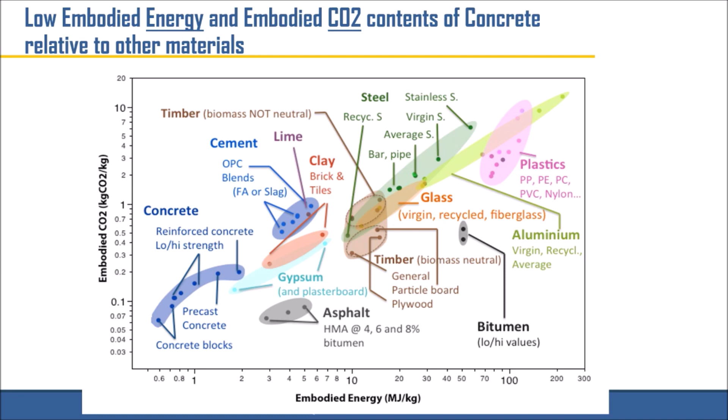But to start with, when we talk about concrete and we look at all of the CO2 and energy that's tied up with products in our industry - concrete, lime, clay, steel, glass, timber, asphalt - concrete really is the low end of the spectrum as far as CO2 output and energy input. We have a position where if we can reduce the carbon output from our concrete, we can make a significant savings. If we use other building materials, we start at a much higher baseline, a much higher global warming potential. So we are working hard to improve our position as it is right now.

EPDs, environmental product declarations, are sold like you buy food at the grocery store with a label that tells you of all the ingredients. That's partially true. The basic unit of an EPD is a global warming potential, which is in kilograms of CO2 per cubic meter of concrete. It's an international number, so most of us like to convert to cubic yards. But it's based on carbon inputs from the source raw material and transportation of that material to a batch plant or a concrete plant site, and then also the energy used to produce the concrete at the plant.

But it stops calculating the global warming potential or the CO2 potential at that point.

The initial EPD for a plant is pretty expensive - it ranges from $5,000 to $7,000 to get a plant set up. They have to go through the process of calculating all of the cost, the fuel cost, the generator or power grid that's used to make the plant. But once your plant is set up, you can generate multiple EPDs after that. Every mix design will have a different EPD if you really get down to it, and they can do that for a very minor cost. It's the initial setup where the expense is.

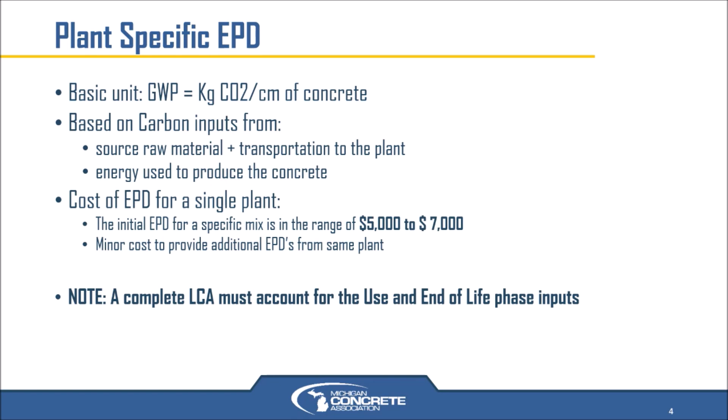But the other important thing to think about here is as we move forward, we need to see what happens during the life of that structure or pavement.

EPDs are based on what's known as a product category rule. Each industry—glass, wood, timber, asphalt, concrete—got together amongst themselves individually and developed product category rules. Everybody wanted to be measured the way they wanted to be measured. So as a DOT, you're going to see EPDs from different materials. They are not all apples—they're apples, oranges, grapes, tangerines. You can't compare one EPD to another and say this product is better or worse based on an EPD.

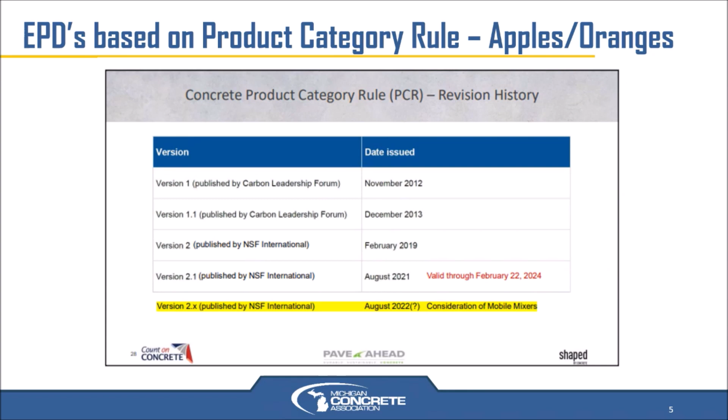And EPDs are in transition. They're updated—how they measure things. There's some changes that are happening as we speak.

But we also know that the life that structure is put in over the next 30, 40, 50, 60, 70, 80 years, depending if it's a building or a road structure, is where most of the carbon impact is going to happen. If you have a building that you have to heat and air condition, the heating bills and air conditioning amount to probably more like 90% of the carbon input, rather than the small portion that goes into construction.

And in addition, during its life, concrete reabsorbs carbon dioxide—CO2 is reabsorbed into concrete. So any surface concrete that's exposed, like a road or a column in a building or a wall, will soak up carbon during its life. Maybe 15, 20% of the carbon that was released when it was constructed comes back into that product during its life.

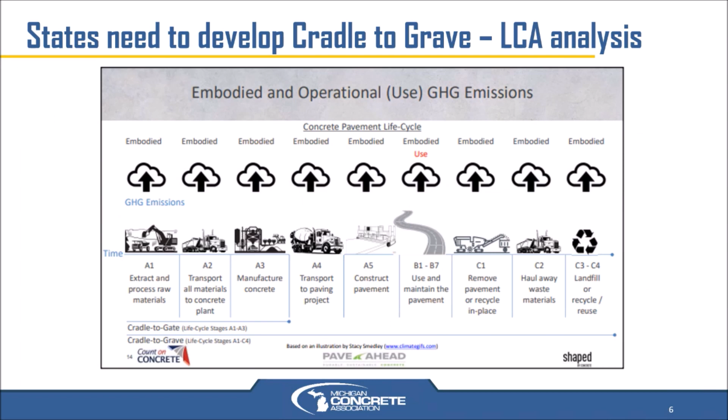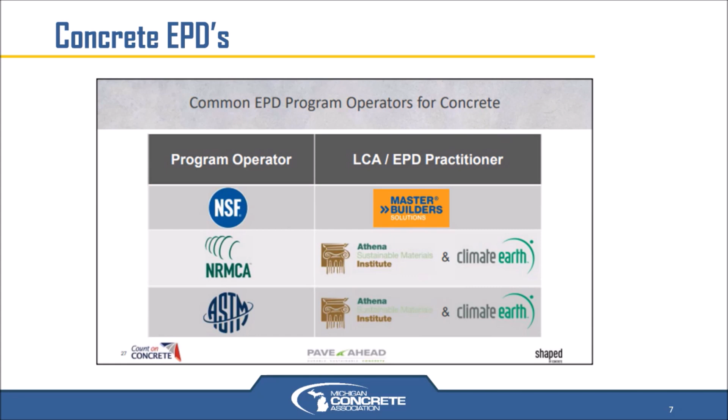Concrete EPDs, and on all EPDs, you need to have a program operator and a practitioner, but also a third party. So with our EPDs in concrete, NSF—now that's not the National Science Foundation that TRB is part of, or what you saw Dr. Fauci work for with COVID, but that is NSF—it is an independent third-party body that was formed in 1944 out of the University of Michigan, and it dealt with food safety and setting up safety standards for small restaurants.

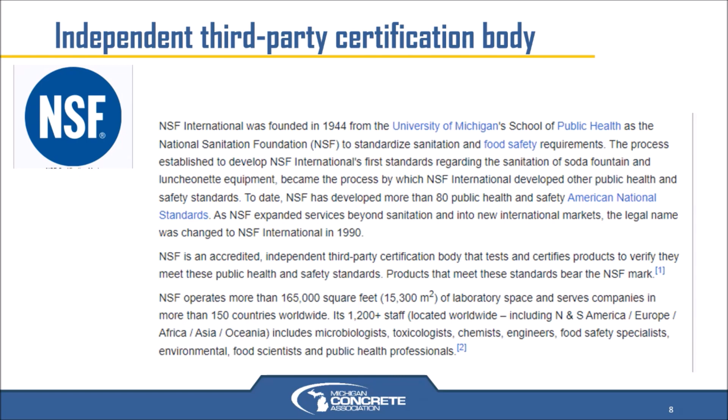And they are one of the leaders still today in testing and keeping people safe in the food sciences and health professions. So they are the body that we look to, to help us keep track of what we're doing here.

GSA, General Services Administration, for all the building work—any building that's built with federal money—they've got standards now. And Federal Highways and FAA are also developing standards as well that people will be required to follow.

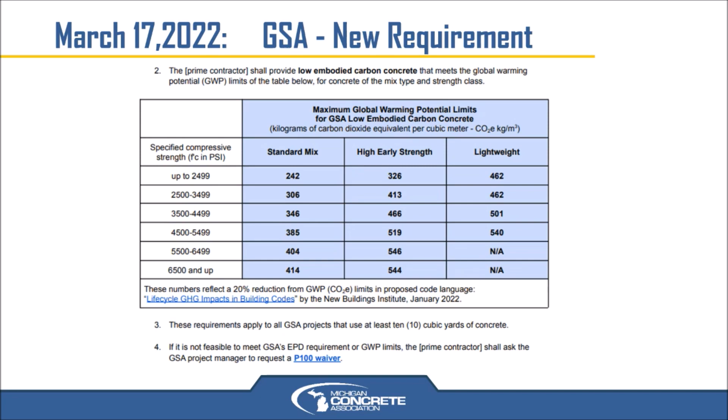When we make cement, we make the clinker—as we heat the limestone, it automatically gives off CO2. That's a byproduct. We put out about almost half a ton of CO2 for every ton of cement just in heating the raw material. The fuel that we burn also adds to the CO2 that goes into the air, and that adds to it.

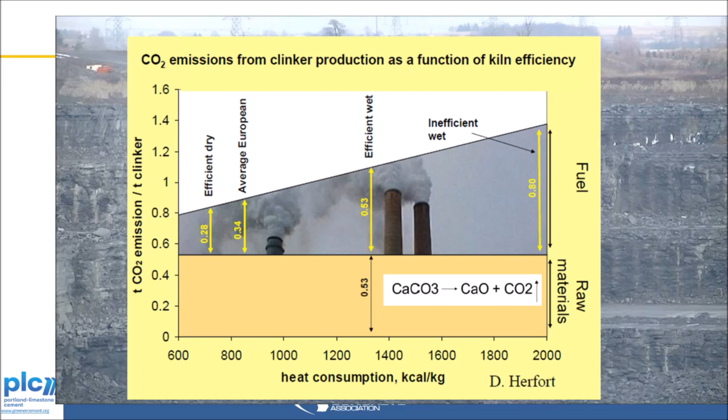The numbers that the inefficient wet system used were what was in Dundee, the plant in Dundee, Michigan. That plant closed a few years ago and won't be reopened because it was a very inefficient process, as opposed to the Charlevoix and Alpena plants, which are much closer to the European average for output.

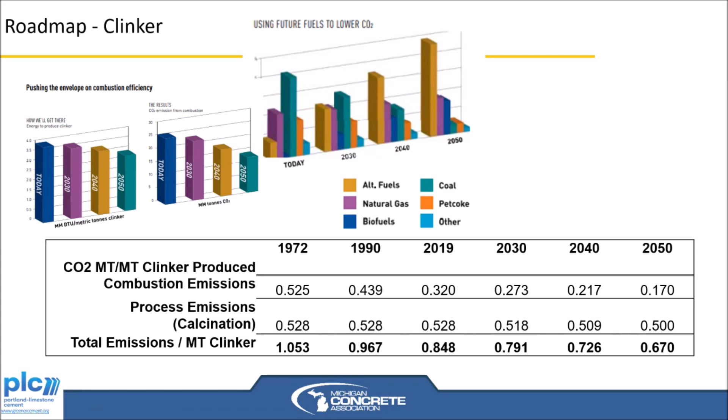So what the cement industry is doing is looking through—and across the bottom of the page here, you'll see that in 1972, there was a little over a ton of CO2 emitted for every ton of cement. By 2019, it's down to about 0.85.

And the goal for the cement industry is to get that number down to 0.67. They're doing it through alternative fuels. Some are switching from coal to natural gas. Others are using different formulations, but the effort is to change the industry to reduce that output.

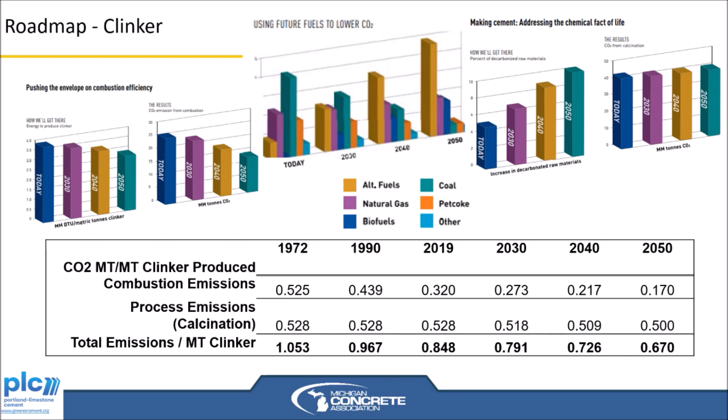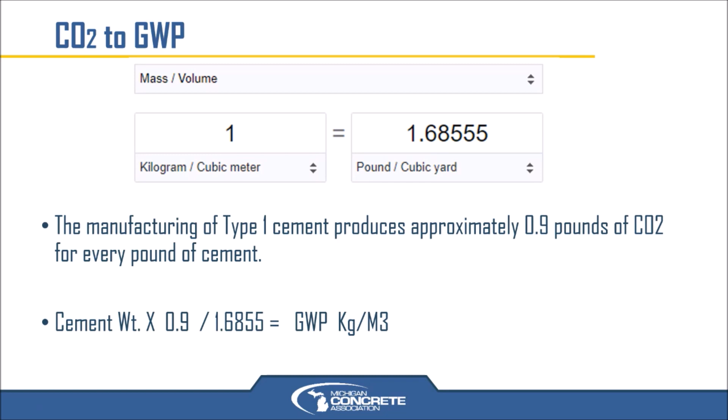Here's the one mathematical formula I'm going to show you today. It's a kilogram per cubic meter converted in pounds per cubic yard. So typically, if we call it 0.9 tons of carbon for every ton of cement, there's a formula we can use to calculate. I've done this with a project we did down in Ann Arbor two years ago.

The GSA target is 385 kilograms per cubic meter. With our standard six-sack mix, we were around 300 just from the cement input, not the other pieces. But when we go to well-graded use of supplemental cements towards the bottom of the page, net combined with the type 1L cement we're using now, we're down to 168 pounds or kilograms per cubic meter, which is a 44% reduction with what we're doing currently.

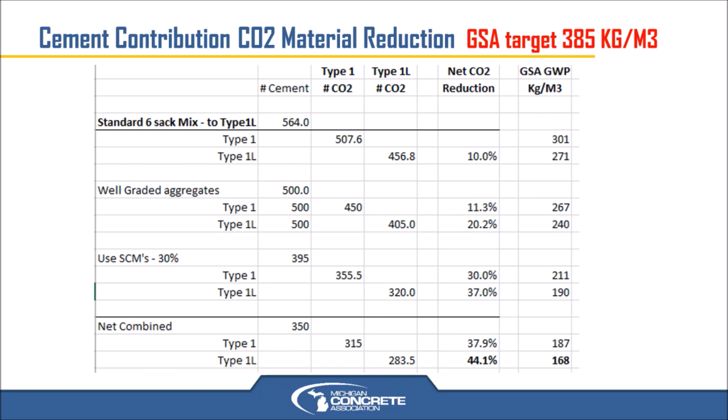So Michigan hasn't been a very strong leader in getting us to this point. Most EPDs are from plants on the coast, California and New York and up in New England. At the time we put this slide together, I got it from a guy that used it in the spring. There were 40,000 EPDs out there. Today, I believe the number is double that. So there's a large volume of these being generated.

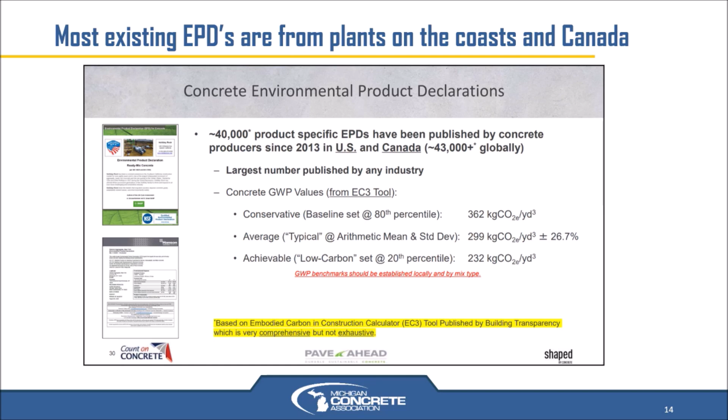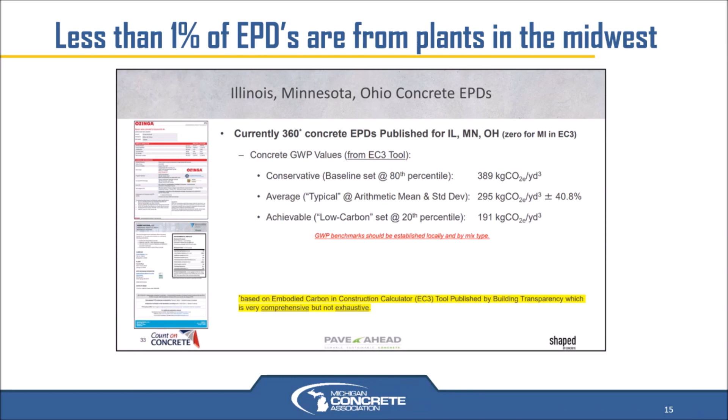Illinois and Minnesota and Ohio, a couple of years ago, were the only places that had it. There were only 360 EPDs from the Midwest. By the way, most other industries in total have less than 1,000 EPDs, but concrete's got quite a few.

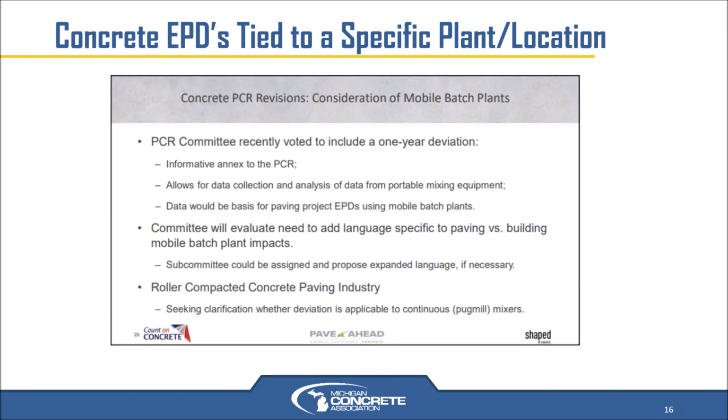They are tied to a specific plant location, and one of the goals is one of the modifications they're trying to do to the programming is to allow for mobile batch plants to be used and have an EPD produced for a mobile batch plant. That's the next phase of EPDs.

Just a reminder that an EPD is from the material manufacturer off to the left, and the state agency really needs to develop a life cycle assessment for people to plug their EPDs into, which allows you to look at the cost of transporting to the project site, construction, and then the use phase, which is where a majority of the carbon dioxide is produced through vehicles driving on the roads or people living in the buildings. And then also the end of life - what do you do, do you crush it up, do you reuse it? All of those go together in our total carbon footprint.

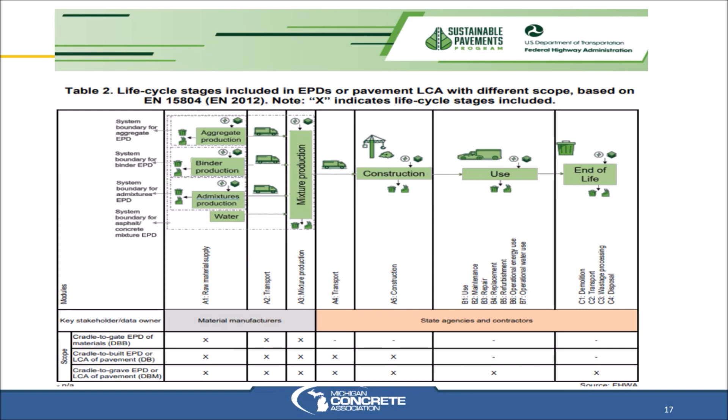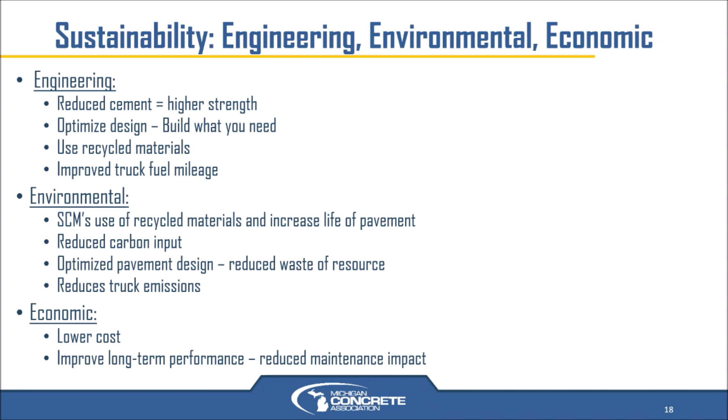Coming back to what we started with: sustainability engineering - we reduce cement, optimize the design, use recycled materials, improve the fuel mileage for trucks driving on concrete roads. Environmental - the use of supplementary cementitious materials, reduced carbon footprint, optimize pavement designs, reduce truck emissions. And then economic - lower costs and improved long-term performance has a very big benefit there. So with that, we thank you, and as more specifications require the EPDs, the Michigan producers will be able to generate those for you going forward.